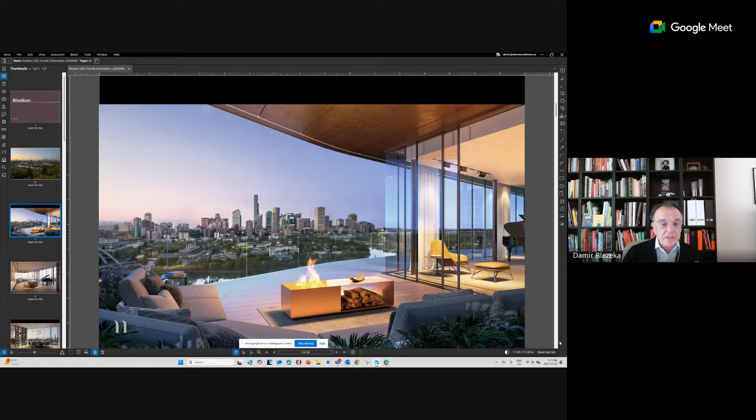So we'll just go quickly through a few of the interior views. That's the kind of penthouse terrace from the same point, and as we go inside through the various rooms - the living room approaching that terrace, the dining room - we just wanted to make sure each one of these spaces in each of the units, the bedroom here, has an uninterrupted view of the skyline as a main selling point of the development.

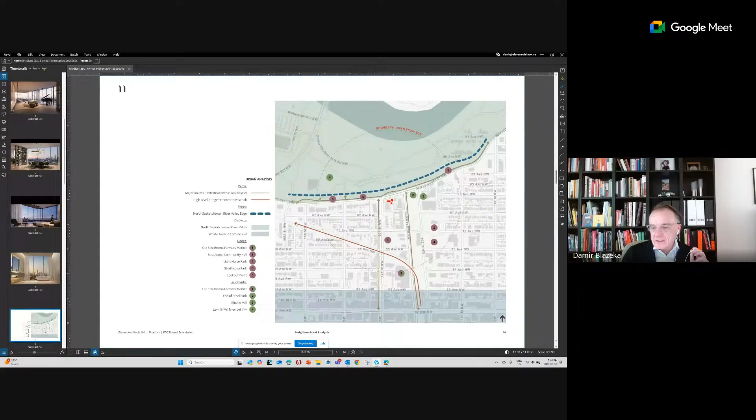You're probably familiar with the location, indicated here with the red dot, the existing situation. It's facing the Saskatchewan River to the north, with other buildings to the south, and directly behind is a 16-story residential tower. So the site is very limited, consisting of just two smaller single-story bungalow type buildings, and we were very constrained with what could be achieved on that site.

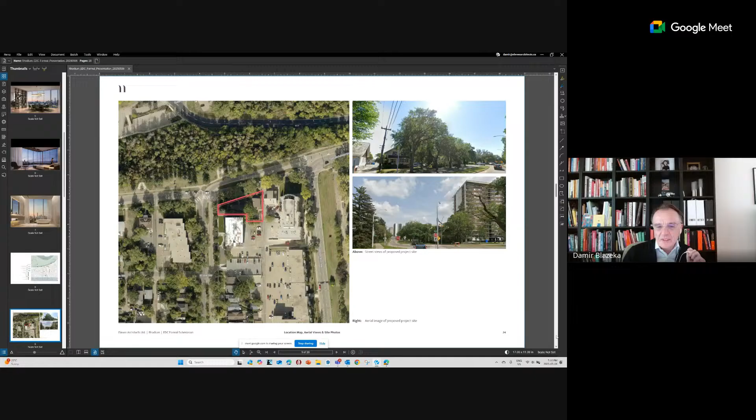For example, for parking, we are proposing 3-level underground parking, but the small footprint presents a problem. We could either put some parking spots or a ramp, but not both, so there was no space for the ramp. We are currently including 2 car elevators because that's the only way to get down there.

But on the other hand, we welcome this as another feature of the project because it's very unique. We haven't found another one in Edmonton, and there are not many installed in Canada—we talked to all of the suppliers and there are very few, far and between, that are installed. So we believe that's another attractive feature of this development.

The other thing, on the relatively small footprint, we tried to create this connection with the surrounding neighborhood and area. We slightly elevated the building on a podium, about 3 feet high, so it provides a slight buffer between the public realm and the private area, but it's still open and there is a really strong visual connection.

You can see it here in the section—there's 3 levels of underground parking and the ground floor of the building is slightly elevated. Also, talking about the views: the top 4 floors obviously have nice views, but we didn't want to shortchange the units on the lower floors. So what we did is create 2-story units on levels 2 and 3, so even they, from their upper level, have reasonable views across and over the trees to the river valley and downtown.

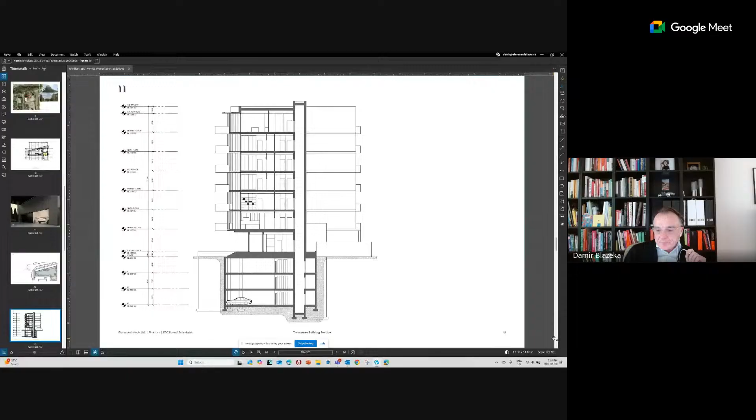Moving on, I've highlighted here this amenity area that looks outside over that elevated buffer zone towards the street. That's a kind of lounge-type amenity area, about half of the footprint, so around 2,000 square feet. It's enclosed, but in the summer it opens up, so there's potential to walk out to the terrace.

So it's kind of with a view to the exterior—the street and pedestrian traffic are visible, but with that slight landscaping buffer, it's kind of slightly detached and allows for a certain level of privacy.

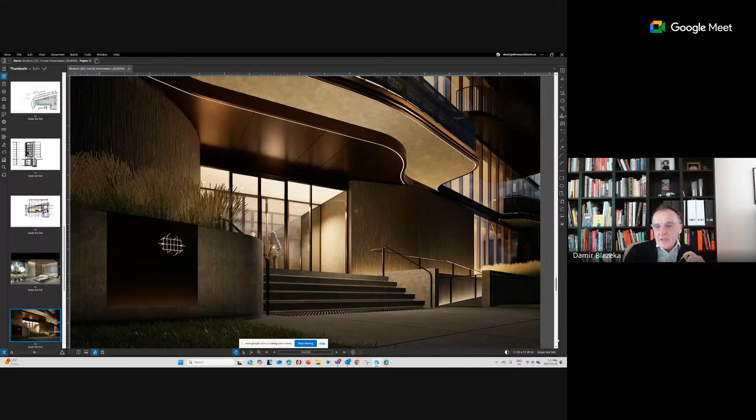Moving on, that's the current vignette of the main entrance. You can see that elevated portion that you access with stairs, either with the stairs or with the ramp, and the entrance is nicely marked and visible. And that's the building viewed from the northeast corner.

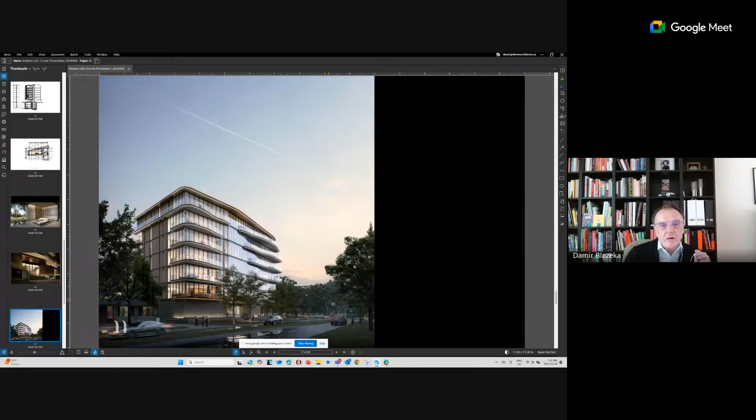We introduced some undulating balconies—interesting fact, the initial concept of the building didn't even have balconies. We had just created a simple open box, and we were suggesting some NanaWalls where they would open, and the living room and spaces themselves would become a terrace. But consulting with our marketing and sales team, they thought that not having balconies would be a hard sell, so we saw this as an opportunity to introduce some undulating shapes.

So we kept the building fairly simple—the structural grid is still lined up, and the bulk of the inside portion of the building is fairly straight. We are playing with some interesting curvilinear shapes on the outside, creating some additional interest when looking from the street perspective.

In terms of material, included in the booklet, we have some stone finish for that raised podium. The ground floor solid portions are dark iron spot brick. We have some curved areas, so we are installing this brick in a vertical way so it can go nicely around the curves. We have floor to ceiling glazing on the north part.

Although most of the apartments have a considerable amount of glazing, overall over 60% of the building is solid. We are very conscious of the functioning of that building in the summer and winter months as well, so on average we have over 60% solid and less than 40% open.

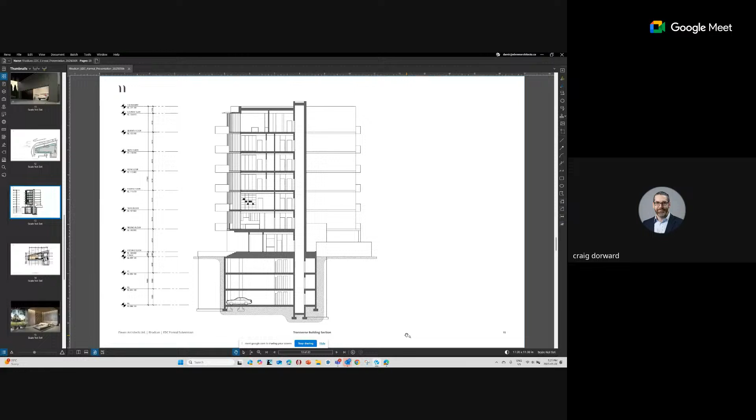And then just lastly on that note - is there enough of a roadway behind that to alleviate backing out into that lane? It's a drive-through elevator, so you'll drive in from the lane and drive out facing the lane. Oh okay, and yeah, we're running swept paths and stuff - we're widening the laneway slightly as well for easier access. There's a laneway upgrade required.

Okay, no thanks, I don't have any other comments, questions, or concerns. Thank you, I'll just add regarding the parking to what Blake said - so we have approximately 12 parking spots per level, so that's at least 36 stalls, and we only have 11 units. But since we're expecting that each household would require at least 2, if not 3, parking spots, so it's available if necessary.

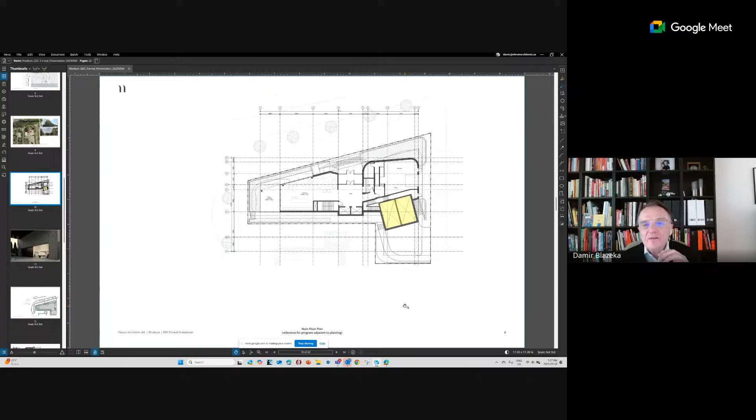Yeah, because they're actually quite large units - I wasn't counting bedrooms, but I think you did have some 3 bedrooms in there. So yeah, we have roughly 2 typical options. On a typical floor we have 2 units, each about 2,000 square feet, and then we have almost 4,500 square foot penthouse. So depending on the demand, we might repeat the penthouse layout on a sub penthouse, which would decrease the number of units to 10, but we'll see how it goes.

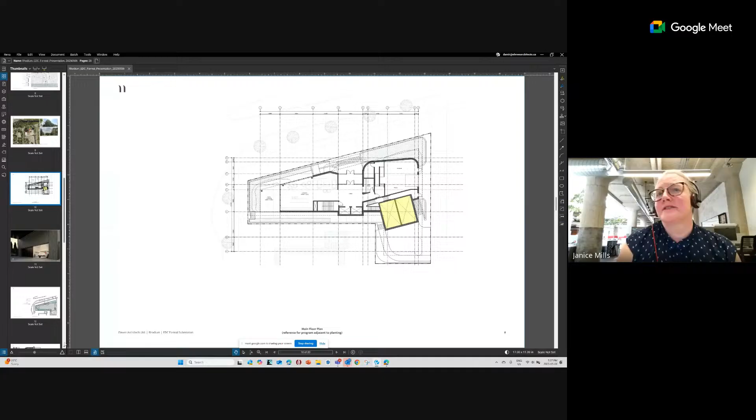Yeah, thanks for the presentation. Good to see this exciting project, you guys. I think this is the first time we've had this many AI attendees in our NEDC meeting, so it's good to see the future is here.

I had two questions. One was about the bike parking, and that's great. That's been addressed, where to park your bike when you're not taking your Ferrari up in a car elevator and driving somewhere. Well, we have to have it, Jonathan. We couldn't not have it.

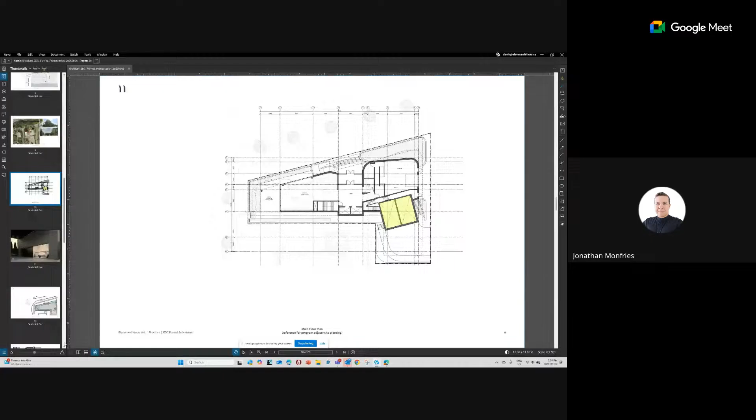So yeah, like there are some expensive bikes that you could use. Anyway, the only question I had was this transformer. I noticed on the landscape sketch there's no transformer, and then it pops up again in the landscape plan, and then disappears again in the main floor plan. Is this transformer on that south or west, kind of southwest corner of the building?

That's still under debate, Jonathan. So there is an option to put it here. There is another option to put it on the northeast corner, and the third and most likely direction will take it to put it underground. So we'll lose some space in the parking garage, but it's going to be completely enclosed because from the developer's point, it's such a small site, and outdoor transformers would be something unsightly.

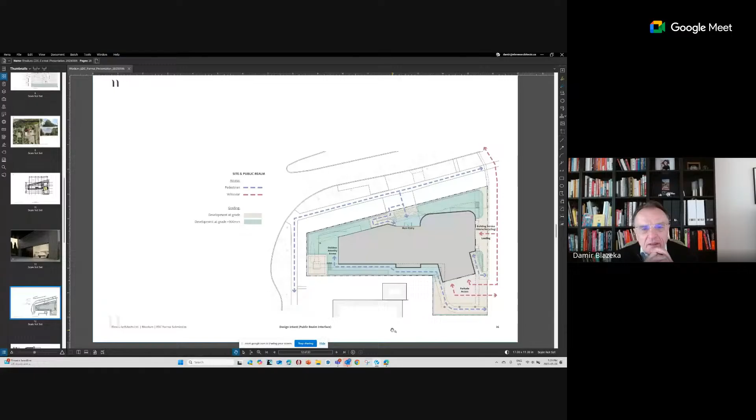Yeah, well, that's exactly where I was coming from, on 104th Street, and that's such a significant corner. Yeah, so that's good to hear. Nothing else. Great project. Good to see it, and best of luck. Thank you. Okay, thanks for that, Jonathan.

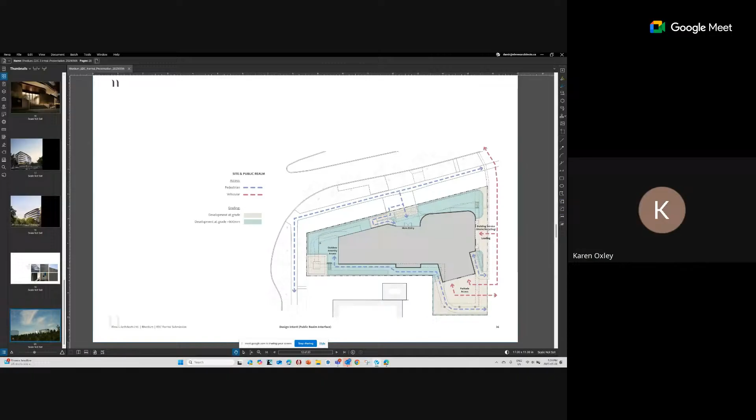We'll move to Karen. Hi there. Thanks for the presentation. I think that building looks really, really lovely. I really enjoy the lines on the balconies, and I'm very pro balcony and outdoor living space.

Really, my questions were around the parking as well, and I was doing a double take. It said car elevator, so I thought that was interesting. That was pretty much it. And parking and access is probably the big one for me. So that's it from my end. Thank you. Okay, thanks for that, Karen.

We'll go to Nick. Thanks, Janice, and thanks for the presentation. Beyond what my colleagues have already said, the only other thing I had that I haven't really seen in your presentation is that southern elevation. You've done nice visuals on the front and the side, but that south elevation and its relationship with the other building, that's the part that I feel is missing at the moment.

It's fairly blank, if I'm interpreting the plans right. So I don't know if you want to speak a little bit about that elevation and what that means to its interface with the properties to the south.

Yeah, I don't know, maybe we can. This kind of shows it a bit on this rendering. You see the north elevation of the neighboring building, and they don't have any windows on that side. It's a kind of residential tower facing east and west, so there is no direct interference. Nobody's overlooking anybody. Our elevation is pretty much solid on the south side. So from that perspective, there's no overshadowing as well, because we are much lower.

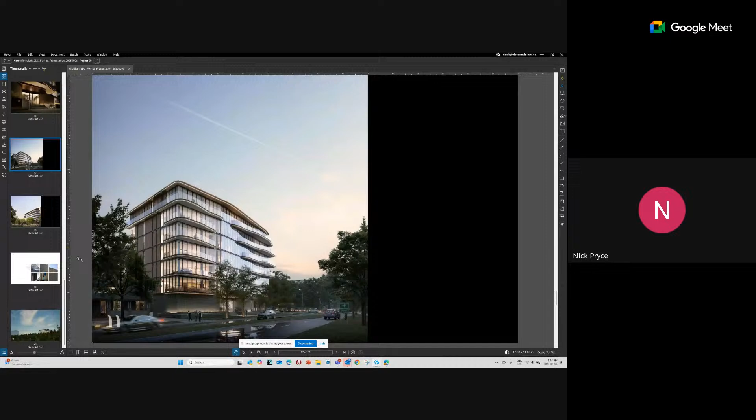Hi, thank you for your presentation. I think the building's quite beautiful from the Saskatchewan Drive perspective. To Jonathan's point, you were indicating you might be putting the transformer into the parking garage, and I think that would be a great idea because it does eat up a lot of space on that corner. Otherwise, I don't think I have any new comments to add that hasn't been addressed already. It looks great, thank you.

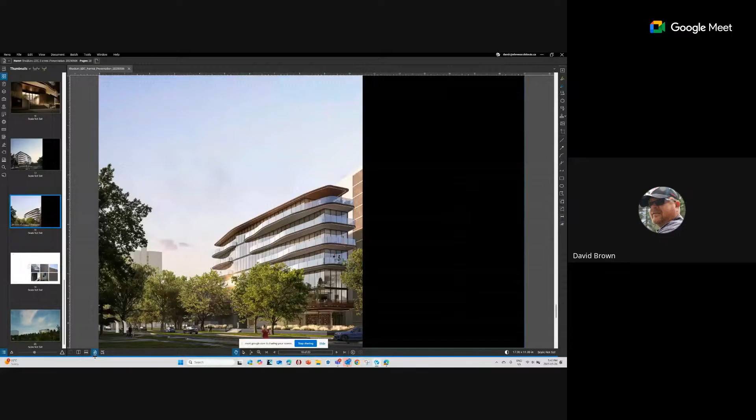Yeah, I wasn't indicating a wall, but most certainly some better definition. And I think one of the other things is that it really needs to tie to what sort of amenities you're providing within that interior space, so it becomes like an extension of that interior space, especially for certain times of the year.

An extension of that interior amenity space. Our inspiration was, I don't know, like a hotel lobby of some upscale boutique space, something like that. I don't have a floor plan, but here it's like some kind of a bar area.

Overlooking the seating lounge area in front of the fireplace, more seating, and to the left, in summer, the glass door would open towards that open terrace area where technically you could sit outside, have a barbecue and stuff like that. But we don't envisage it as being super busy.

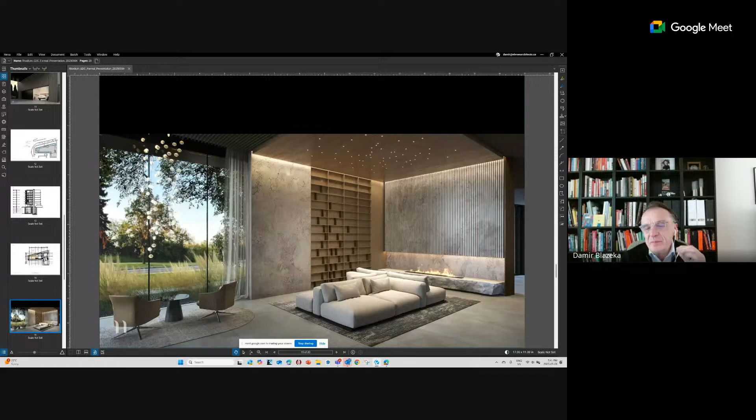Okay, thank you. Yeah, thank you. Okay, thanks for that, David. We'll go to Shay.

Awesome, well, great presentation. This is a very exciting, elegant project, really nice massing. Compliments to the excellent selection of north-facing vegetation. Karl Foerster and junipers are classic choices. And again, the material usage I think is really great.

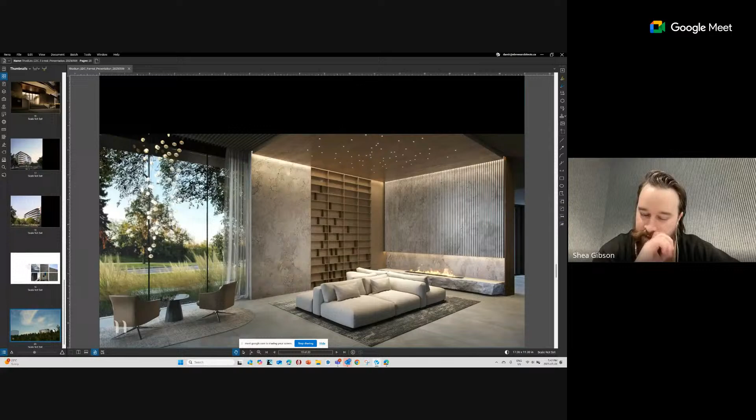A lot of them are a darker material, and they are darker at the pedestrian interface. I see from the lighting plan that the lighting solution and strategies for this will really elevate that ground floor connection with the rest of Saskatchewan Drive, so the first floor doesn't feel too dark and vacuous. But from some of the renderings I'm seeing, it looks pretty well lit.

If you need some ammunition for your PMT location, as we've all chatted about, I'm 90% sure EPCOR also won't allow you to have the PMT under any occupied spaces, and I think here a bit of that unit conflicts there. So if you need ammunition to move it underground, there's something you can use.

My only other main comment is, again, that interface between the south edge of the property and the larger tower below. There's a strip of columnar blue spruce, and what I see is purple spire crabapple planting. That's a really narrow planting space, and if I read the elevations, there's also a retaining wall there.

So all this vegetation is sitting in this space between two really large buildings and a full canopy of trees, and I'm wondering if especially those trees will be able to live in that narrow space, and if there's a way to move them elsewhere on site, out of that dark space crammed between two rather large developments.

Outside of that, I'm just curious about other ideas you might have in mind for what that outdoor amenity common space could be. If there's a way to put some drink rails on the edge or some seating integrated into the architecture versus just FF&E, that would make the space look really great when it's probably not going to be utilized much in the winter months.

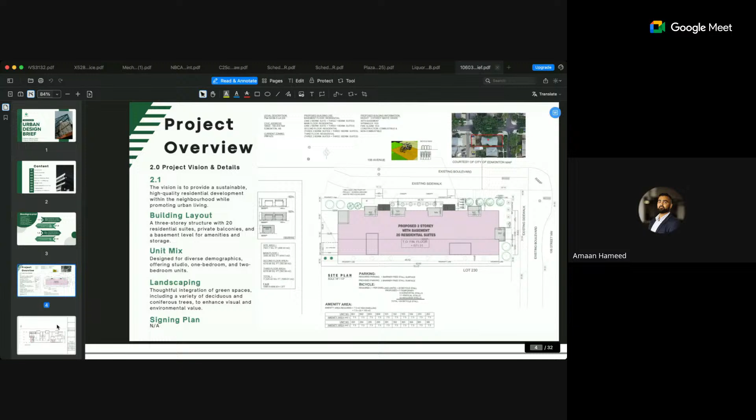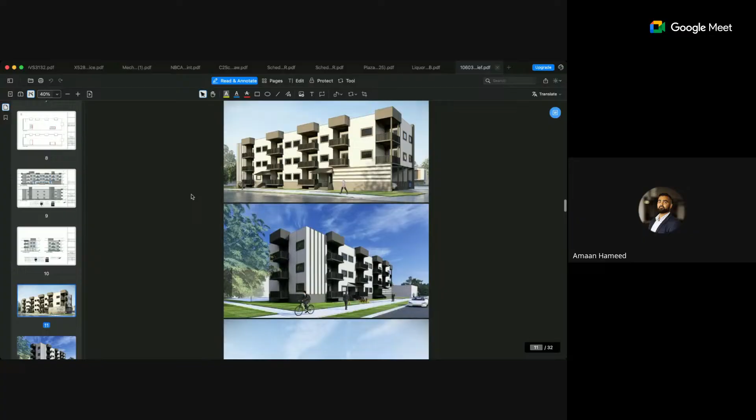Okay, thanks, perfect. I'll skip through here — this is the basement floor plan, this is the main floor plan, and I'll get over to the built forms page. We'll go over here. This is the 3D rendering as to how the building, the proposed development, will look once we get to that stage.

The mass itself was carefully scaled to respect the adjacent properties and blended into the fabric of the neighborhood. It's articulated with facades, balconies, and varied roof lines, which ensures the building presents a human scale, which contributes to an inviting streetscape. The ground floor includes a walk-up entrance, which improves the activation and visibility of the building itself.

We do believe that the design meets all the zoning parameters under the current zoning designation, RMH 23, including height, floor to area ratio, and setbacks. This density was done thoughtfully and carefully to ensure there would not be additional impact on the surrounding properties and the surrounding community at large.

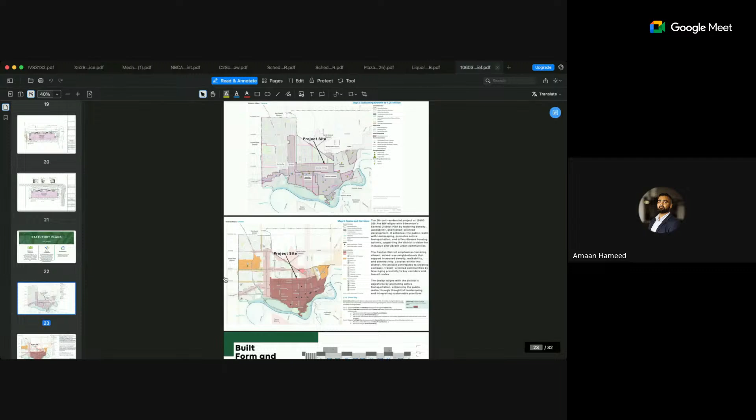Just moving forward a bit further, when it comes to the city of Edmonton as a whole, this site—I'll zoom in here—sits right on the corner of 108th Avenue, which falls under the Central District.

The central district, according to the city plan, emphasizes vibrant mixed-use neighborhoods, supporting density, walkability, and connectivity. We believe, with the city plan and the zoning bylaw changes that occurred in January 2024, that the development we are proposing fits within all the confines of what City Council and City Administration have worked tirelessly towards. We're hoping that as we move further along with EDC, we can garner your support for this development.

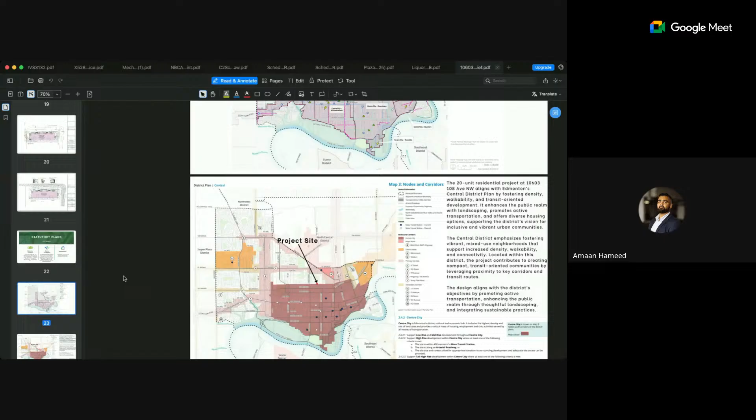I'll jump over to this side. When it comes to accessibility, we focused the foundation of this project on barrier-free entrances with clear pedestrian paths and connections to transit.

The public realm is enhanced with wide sidewalks, landscaping, and open space along the frontage. We have provided a secure, well-lit bike room with approximately 24 stalls, including inclusive bike stalls and repair areas to encourage cycling as a primary mode of transportation. We also feel this reflects the city's goals of reducing vehicle dependency and supporting active transportation.

In addition, when it comes to landscaping, we focused on year-round function and beauty, incorporating deciduous and coniferous trees such as the columnar Colorado spruce and the Japanese white birch for visual variety. We would also include low-maintenance shrubs and green spaces to promote social interaction, softening the urban edges of the site. The outdoor areas would be activated with winter-friendly ideas in mind, with accessible paths, lighting, and species selected to thrive in our urban climate here in Edmonton.

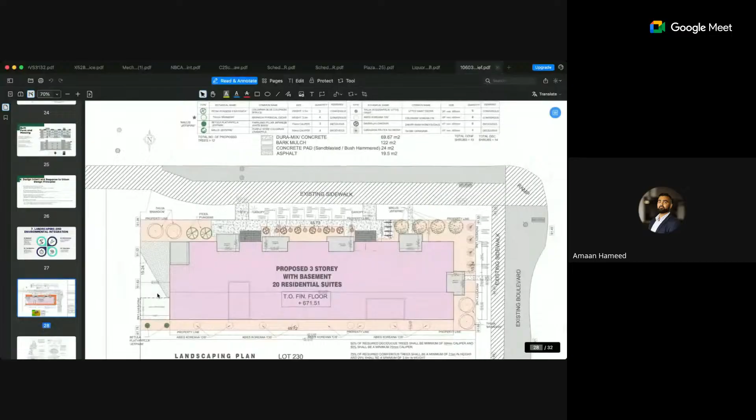These spaces would support relaxation, gathering, and reinforce the feeling of community as we move along in this development. Going into our landscaping plan here on page 28, showing the bike stalls as well.

Jumping into the final two slides here, we again believe that with respect to the Edmonton City Plan, this project aligns on multiple city priorities, including promoting nodes and corridors, active transportation, and density near transit. The central district plan is looking for walkable, connected, and vibrant neighborhoods, which we believe this development fulfills and adheres to, alongside being compliant with the zoning of the RMH 23 zone. We believe by aligning with these frameworks, we are contributing to Edmonton's long-term vision for sustainable, resilient growth.

In relation to parking, we have provided 3 surface barrier-free parking stalls, minimizing hardscaping and aligning with the walkable nature of the area. We've also provided bike parking which exceeds the minimum requirements, supporting an alternative commuting option. Our site access is straightforward, with clear pathways to the adjacent sidewalks and nearby bus routes. This supports a car-light lifestyle, which again aligns with the city's overall transportation and sustainability targets.

Overall, to wrap up our talking points, we believe this proposal reflects the future of an urban Edmonton—compact, connected, accessible, and sustainable. Most importantly, it is modest. It's a well-scaled development that brings thoughtful density to a growing corridor. It's not overwhelming, nor is it overbearing to the surrounding property owners and neighborhood. We believe it enhances the public realm, supports active transportation, and delivers much needed housing without overburdening the infrastructure.

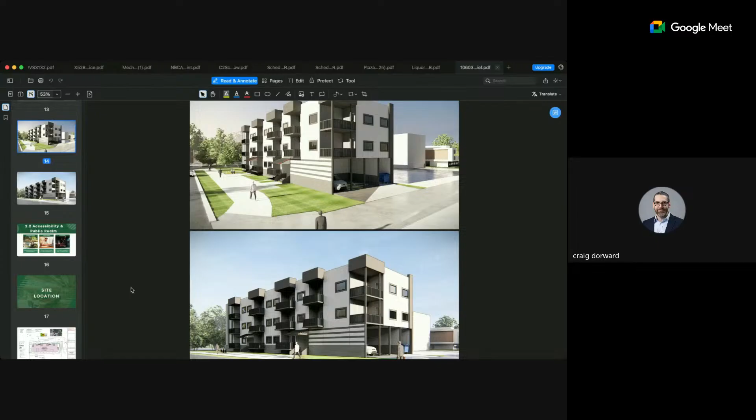What I have a question about touches on a few things here. I don't know how to get into it. On one of the plans, it's showing a sidewalk up to the balcony. Are any of these units a ground floor unit? Do they have direct access to the outside? What's the intent of the sidewalk going up to the balcony when the balcony is raised? I don't know, 2-3 feet, I don't know what that dimension is.

Yeah, no, that's a good question. I do believe there would be direct access once we get into one of the units onto the ground floor levels. There is a basement floor, and then there's the 3 floors above that. But where we are at this stage, to be somewhat blunt, the developer has not made a concrete decision on the final look of this building. So if there are recommendations or suggestions from the EDC that feel would be an appropriate fit or a better way to make this building more attractive or a little bit more welcoming, they are open to that. They also have to be mindful of the complexity and changing nature of pricing of materials and the way things are going down south, which they've had to keep in mind when it comes to the final mass of this building. But they are looking to build something that would be very well welcomed by the neighborhood and the overall community. So they sent me to this presentation to ensure I can go back to them with comments and suggestions from the EDC that can ultimately take this building from its current look, shape and feel and make it something that is a welcome addition to a neighborhood that has faced certain problematic issues.

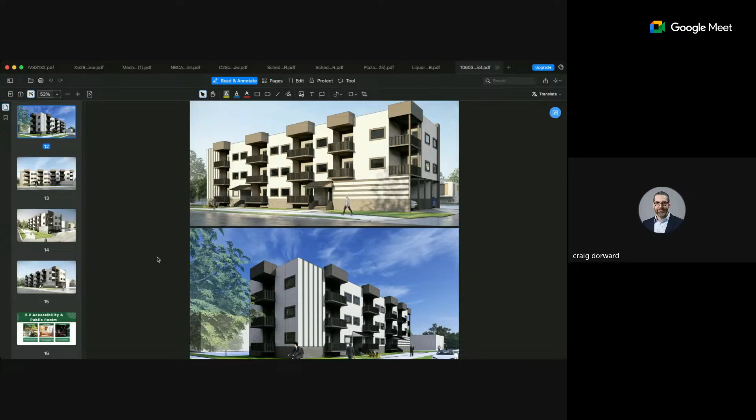I don't know how much, if any, light and air you're going to get into those basement suites. Not to take it to a building permit level, but the exiting from that bedroom window in the basement, I don't know how you're going to exit through that space. That's a little bit problematic to me.

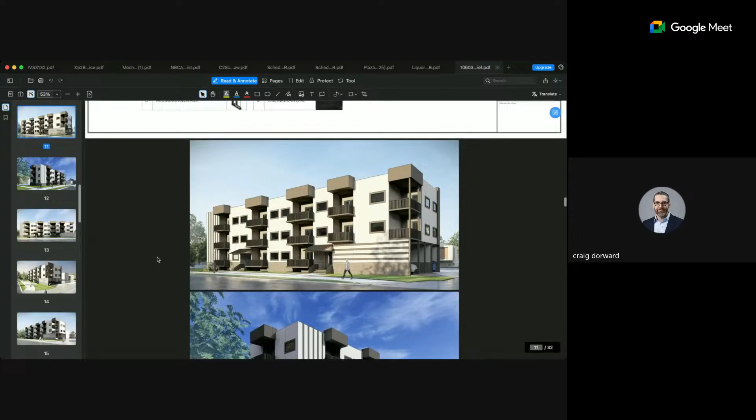The other thing I see on the floor plan, you have two main entrances to the building, correct? One of them, maybe it's just a little inconsistent in one of the drawings, is right up tight to the balcony side versus the other side. Having some kind of separation or massing to separate the public main entrance from the private balcony would be helpful.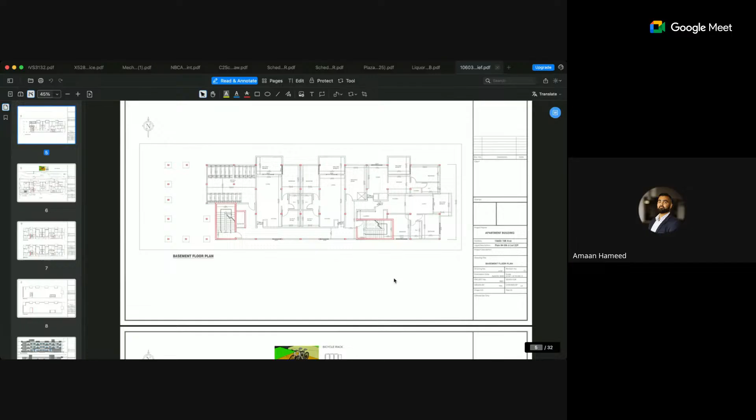I think that's most of my comments. The only other thing I'll say is... no, I'll leave it there. I'll leave it for my colleagues. Thank you.

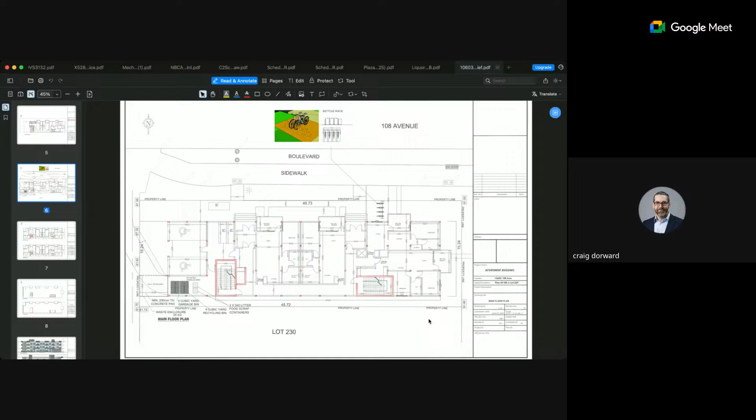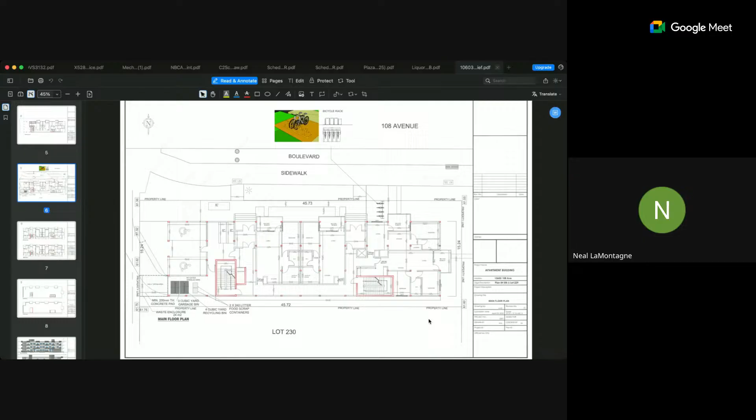I really want to echo Craig's comments about that basement with those patios. From what I see, there's not a lot of separation between the ground and the main floor balconies. That's going to create a dark space. For the basement one, it's kind of like, why even have an outdoor patio if I don't know if it'll be used.

That's a concern. Also, to follow up on Mindy's point, I think there's a big gap between being soft-spoken and not wanting to be bold, and being bold. So some more visual articulation would help a lot, or at least help a little. But I think my primary concern is that basement level.

There's just not enough. You do speak to barrier free, which I super appreciate, but I think the only barrier free access is from the parking, which makes some sense. But then again, it doesn't seem like you're that high off the ground at your main entrance from the sidewalk. So the only barrier free entrance is actually from the parking. Or am I misreading that?

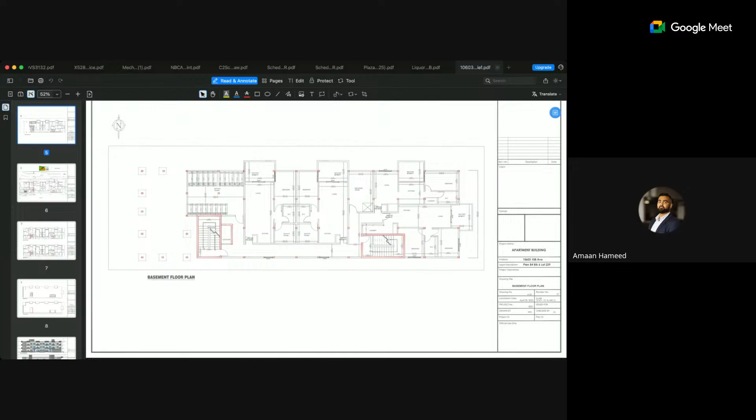No, I think everyone makes very valid points, and this is something that, at the end of the day, is helpful to hear, because we can take it back to the developer and design team to let them know there's room for improvement. Everybody wants to make a development that is welcoming but also designed with the correct principles in mind. I appreciate your comments, Neal. More than anything, we want a successful project. 1,000%. I think everyone does.

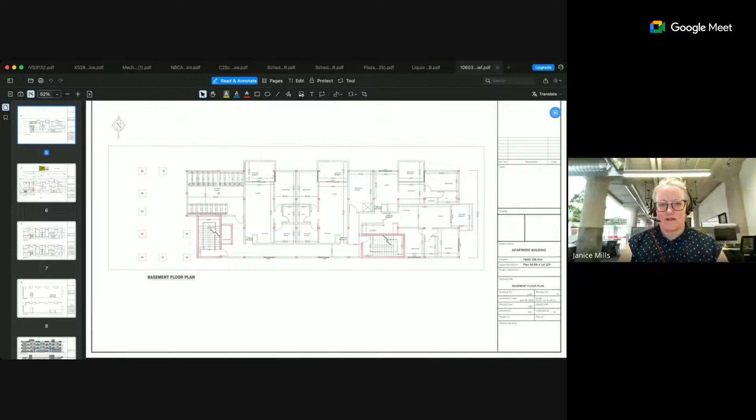Thanks for your presentation. I think everyone's had a chance to talk about the building form and articulation. The other point to add is the tuck under parking. That's quite a mass of wall that covers that space, and it doesn't look very safe. It might be a good idea to consider creating a more permeable, decorative screen instead of that wall, so there's a little bit more eyes on the street, and it doesn't look as massive.

And then, only being a landscape architect, I think there needs to be some refinement. Craig talked about the activation of those balconies as entrances into the building, which would activate the street a lot better. But I think also how you approach the site landscape could better define the building frontages and entrances, and that transition between the public realm and private realm.

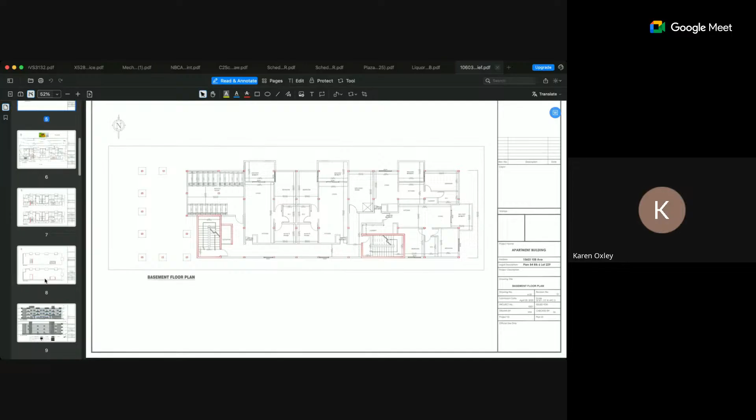So just to start, I might be going 180 from everyone else, but to me the building almost feels top heavy. I'm wondering if that might be part of the challenge with the welcoming aspect - it just feels top heavy with the roof line protruding. I understand the purpose of it, but maybe that might help with the welcoming factor.

Yeah, I can definitely speak with the developer. At the end of the day it's their project, their baby, and all these comments and suggestions are very helpful. To be the messenger in the middle, they've been dealing, unfortunately, in this neighborhood with quite a few break-ins, so they're trying to get a new product into the market with more levels of added security, and hence it was designed this way with a bit more top heaviness versus the current structure on site. But all these suggestions, as you know, what you see is not necessarily the final development that ends up at the construction stage. I'll wait for your comments in the next 48 hours, and the revisions and changes will be made accordingly.

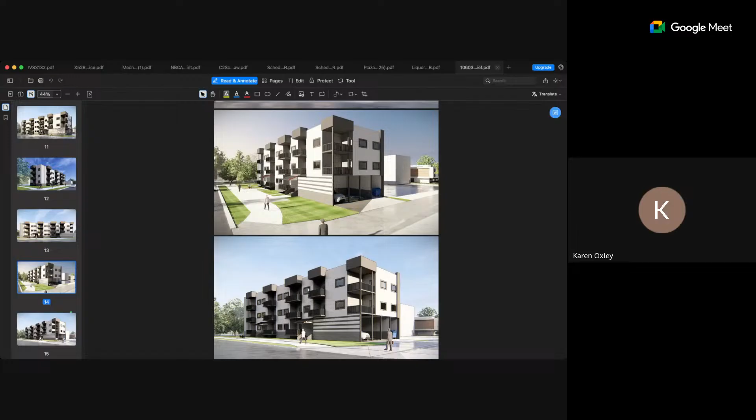The basement patios are a bit strange, they're almost like pillboxes. I think that might actually be a safety risk - people could roll in there and set up. So I don't know if that's really a good strategy.

I feel like a little bit more can be done on the landscaping. I have difficulty seeing the site plan and comparing it to this rendering to get a full understanding of what is actually sidewalk and what is actually grass. It does appear you're adding a lot of sidewalk, and I'm not entirely sure what the purpose is - it gets deeper and closer in the rendering shown here. I think you probably have a better opportunity to tie the units down to grade, much like Craig was mentioning, to find an interaction there. You do have two main entrances, but they don't read very much like a main entrance, like giving a welcoming feeling. They kind of just blend in and could be anyone's main entrance to their unit.

I think, and maybe you could answer this, but the canopies over the main entrances - what is the material on that? That's a good question, I don't have an answer at the moment. I could confirm and reply back via email to everyone, or to the EDC email lead, Ashley, and she can provide that confirmation.

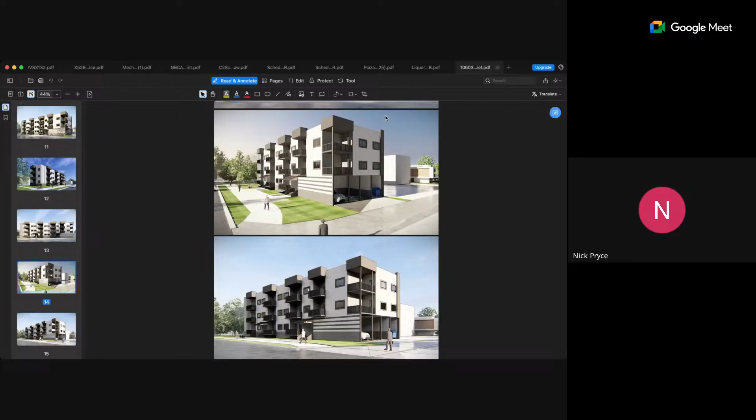Thanks very much for your presentation. I generally agree with what my colleagues have already said. I'm struggling with this one from a materiality and design perspective. I think the massing's right, but the other elements with the parking garage that was brought up, the basement's concerning, and the materiality is not there. It's just not fitting. Without going into too much detail, I'll leave it at that and pass it on. I think most of the comments have already been made, so thank you. Okay, thank you, Nick. We'll go to Shea.

Hey Eamon, thanks for the presentation. A lot of good feedback there. I'll try to present some new comments for you to address as well. So a couple of things to note: if there is a concern about safety on the site and for the neighborhood, I think having the garbage enclosure exposed and open, especially with the return for the door, creates some concealed spaces there. It might be good to close that off and provide some sort of buffer between that space and the rest of the public realm, especially with it being under some occupied spaces.

Additionally, I think there's some depth that can be explored here, more than just materiality. Utilizing stucco, there are some options that can be explored as the project continues to get developed and moves into design development. It would be worth exploring some reveals and other data points on the project to help alleviate some of the flatness, and maybe even capping the top of the building with some sort of capital or terminating point, because right now it just kind of bleeds into the sky.

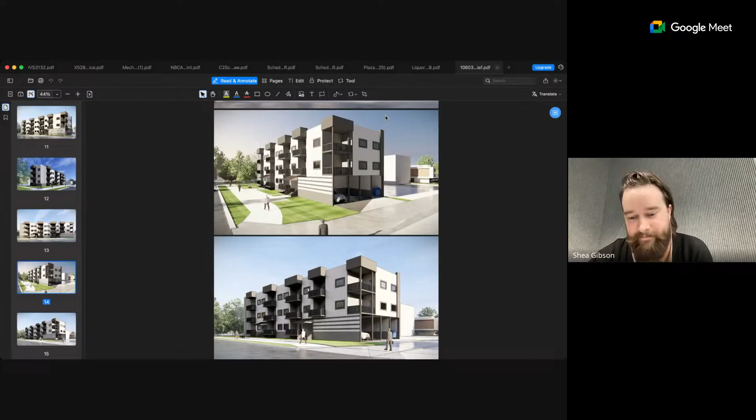Okay, thanks Shea. I am the last, and I don't think I have anything more to add. I kind of echo and reiterate David's comments regarding that drive-under parking area. I think gaining some transparency into that area would improve the level of safety within it, as well as what we heard regarding the safety of the garbage area, especially given the comments, Eamon, that you had about the local troubles they've been seeing. So with that, Eamon, I'd like to thank you for bringing this before us.

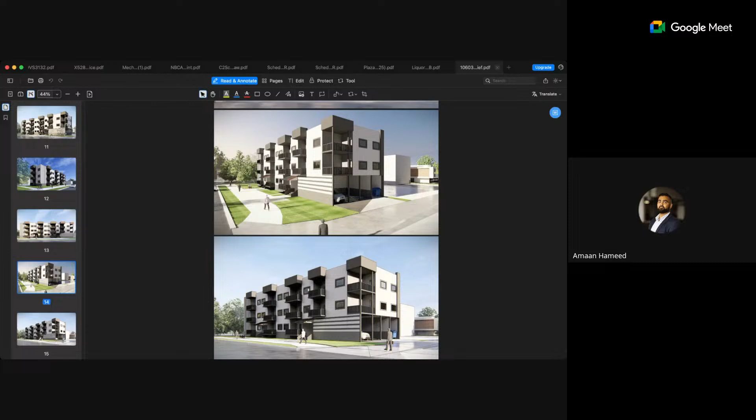Okay, so with that, maybe I'll open up the floor to the committee. I think we heard from a few people about the building form, articulation, etc. I'm not sure if anyone wants to make any comments regarding that. Nick?

Yeah, I think there's a lot of work to be done on this one. Like I mentioned, I think the massing is there, but everybody pointed out the exterior design isn't really there. The functionality with the basement and the garage area is not working right. So there's a number of challenges with this overall design from my perspective. I'm struggling to see how it aligns. I think there's a lot of work to be done there. So that would be my comments. I think David's captured most of it.

The only other comment I'd make is we didn't see anything around lighting on the exterior, which adds to some of that urban design element, so it might be worth bringing that into the recommendation.

David, I thought I did see some lighting in a lighting plan in there. I may have missed it, but I believe there was a lighting plan within the document. Specific to the lighting plan, I had one comment on it. I'm just finding it again. They had bollard lights right in the middle of the sidewalk, if I'm not mistaken. Did anyone else catch that?

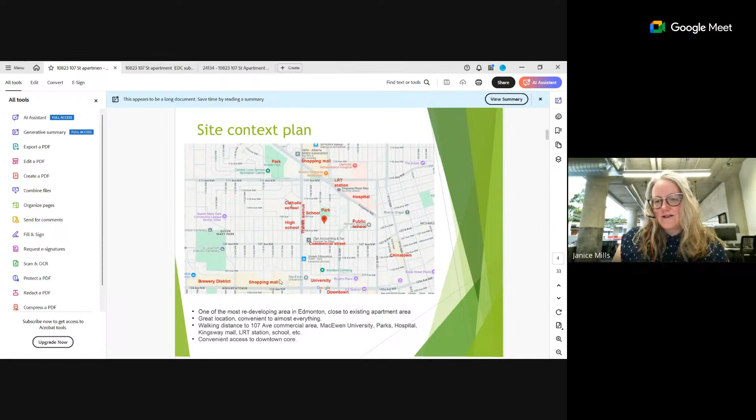Hopefully third time's a charm. Classic tech support, did you restart your computer? That's what IT always asks. Thanks, Abby.

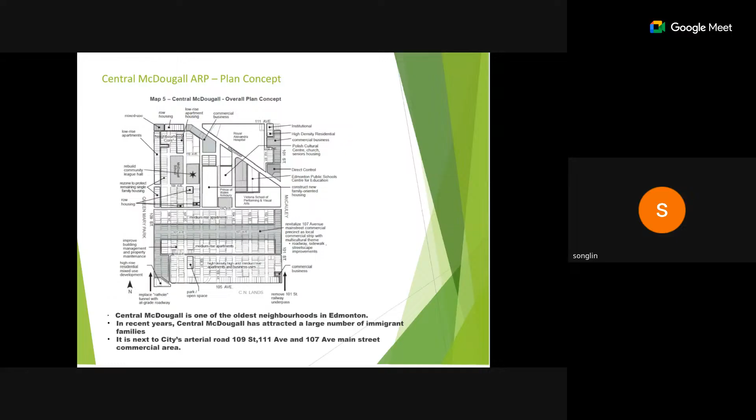Our project is located in Central McDougall, one of the oldest neighborhoods in Edmonton. In recent years, Central McDougall has attracted a large number of immigrant families. It is next to the city's arterial roads, 109th Street, 111 Avenue, and 107 Avenue main street commercial area.

Let's look at the site context plan. This area is one of the most redeveloping areas in Edmonton. It is close to an existing apartment area. There are a lot of apartments built decades ago along 107 Avenue and from 105 Street to 112 Street.

It is a great location, convenient to almost everything. It is walking distance to the 107 Avenue commercial area, MacEwan University, the parks, hospital, Kingsway Mall, LRT station, and the schools, and has convenient access to the city's downtown core.

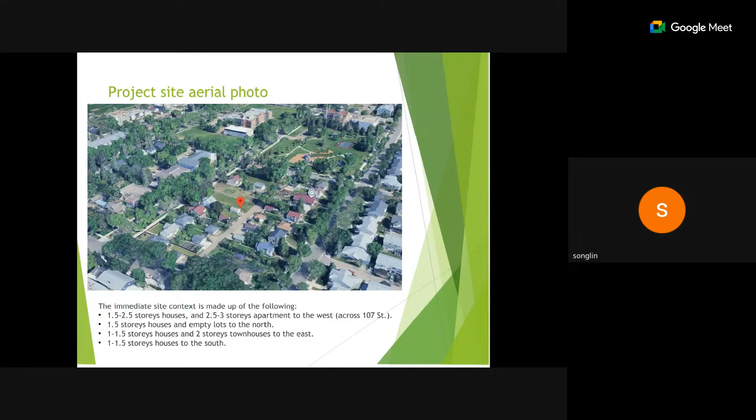The immediate site context is made up of the following: 1.5 to 2.5 story houses and 2.5 to 3-story apartments to the west across 107th Street; 1.5 story houses and an empty lot to the north; 1 to 1.5 story houses and 2-story townhouses to the east; and 1 to 1.5 story houses to the south. These are some existing site photos looking from 107th Street and the back alley.

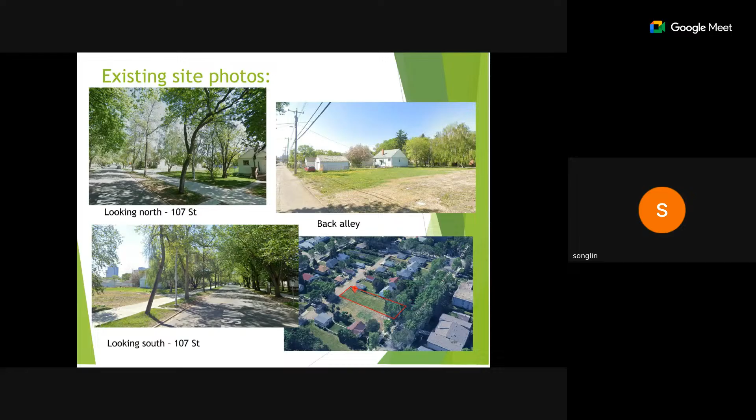I would like to share some former projects similar to this proposed apartment. Next, please. The project overview:

It is a 3-story apartment building with 8 units. The building height is 30 feet 2 inches, or 9.19 meters tall, which meets the RS zoning requirement. It is located at 10823 107th Street. There are many existing apartments in this area. The site area is 697 square meters, our total floor area is 611 square meters... 697 square meters, and the FAR is 0.88. We have provided a rooftop patio amenity space for the residents. The parking is along the back lane.

For the building design, this building is designed to meet the city's zoning bylaw requirements and the Central McDougall area redevelopment plan. The proposed building is 3-story and 9.19 meters tall, which meets the zoning requirement of maximum 10.5 meters or 3 stories. The front setback is 4.5 meters, the rear setback is 16.22 meters, and both side setbacks are 3.05 meters, all meeting or exceeding the zoning bylaw requirements.

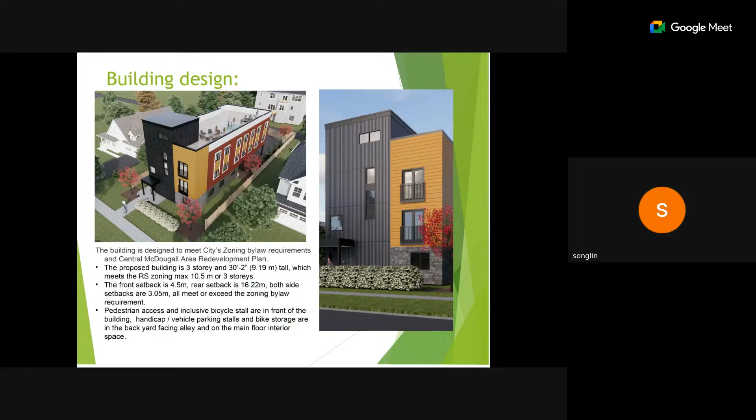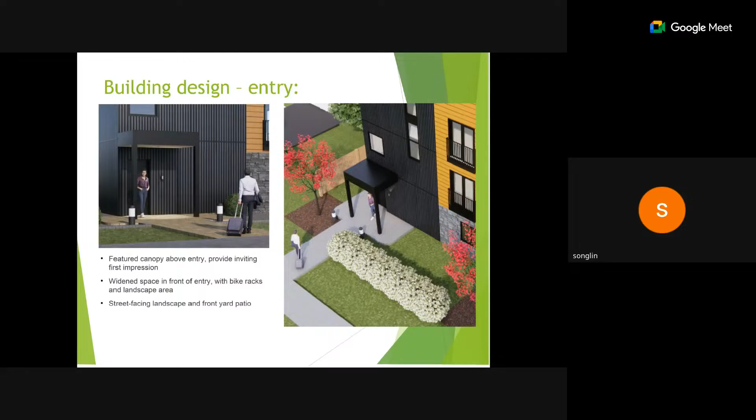For the building design, this building is designed to meet the city's zoning bylaw requirements and the ARP. The proposed building is 3-story, which meets the requirement. We have designed a modern style with materials and colors kept neutral to match the adjacent existing and new buildings, so the building mass, materials, and colors are consistent with other apartment buildings in this area.

The apartment's main entrance faces the front on 107th Street with a feature canopy and landscaped surroundings. The apartment also has a rear entrance facing the parking stalls. EIFS stucco, metal sidings, and stone veneer with neutral colors and accent feature elements are used in the elevation design to create design interest and a human scale feeling. We have provided adequate exterior light fixtures and illuminated signage for customer and resident safety. Next, please.

Urban design principle: the building is designed to strengthen the character of the urban revitalization in this area. The design enhances the pedestrian experience.

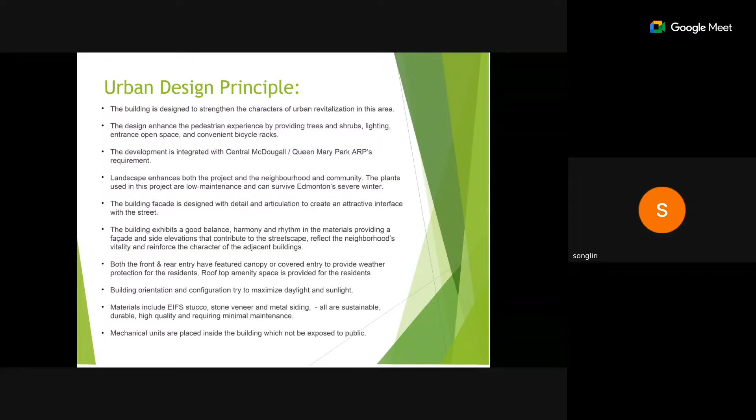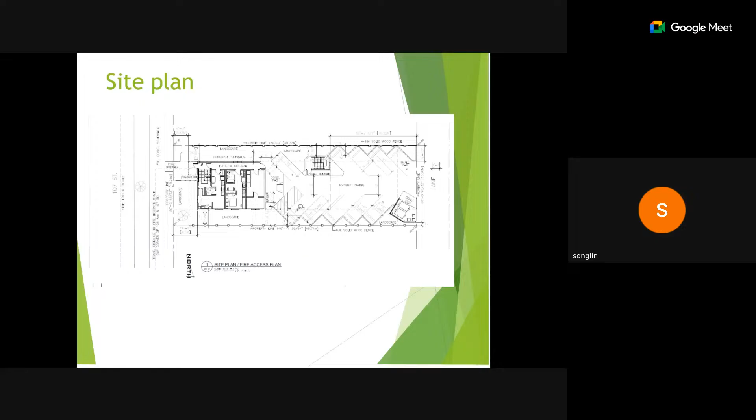This is the site plan. On the main floor, we reduced the building area to have only 2 small units. We have provided adequate parking and a garbage pickup area in the backyard.

This is the main floor plan. There are 2 units on the main floor, and we also provide a laundry room on the main floor. The mechanical room is also inside, at the back.

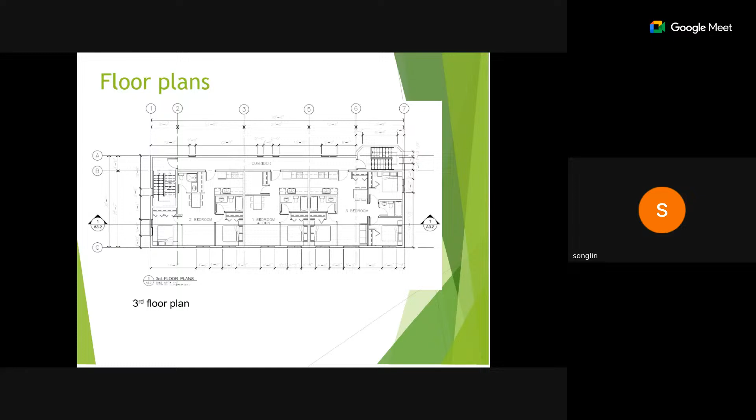Third floor is pretty much the same as the second floor. The roof plan shows that we have provided a rooftop patio for the residents.

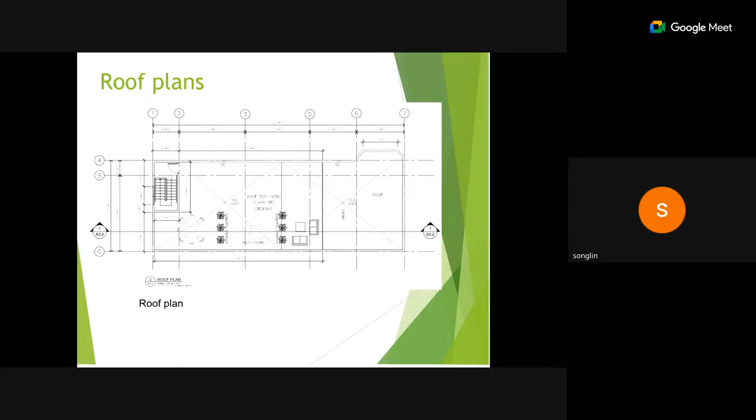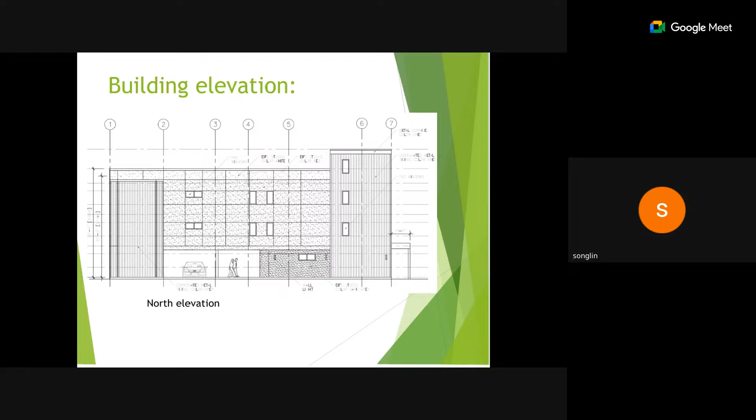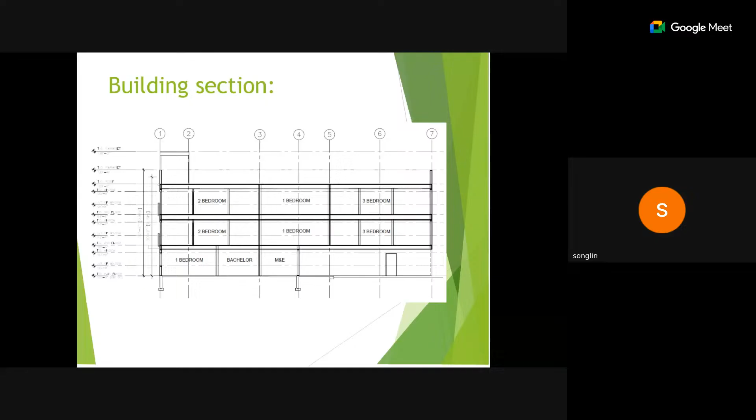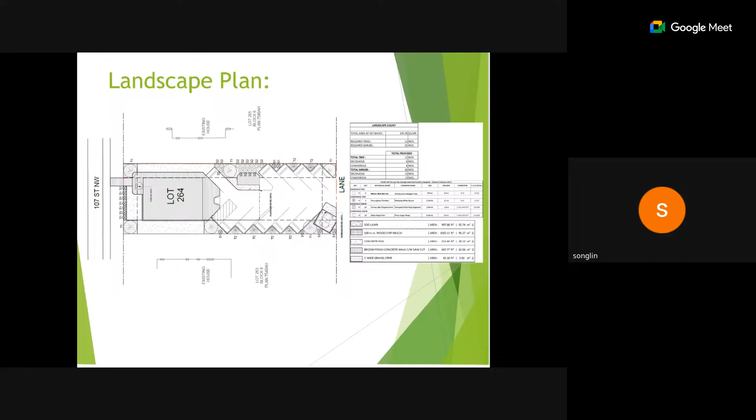Landscape plan: we have the landscape architect joining this meeting, and he's happy to answer any questions about the landscape.

These are the trees and shrubs that we use for this property.

Signage: because this is only an apartment building without any commercial use, we just use a simple letter signage to show the address of the building, so people and visitors can easily find the location.